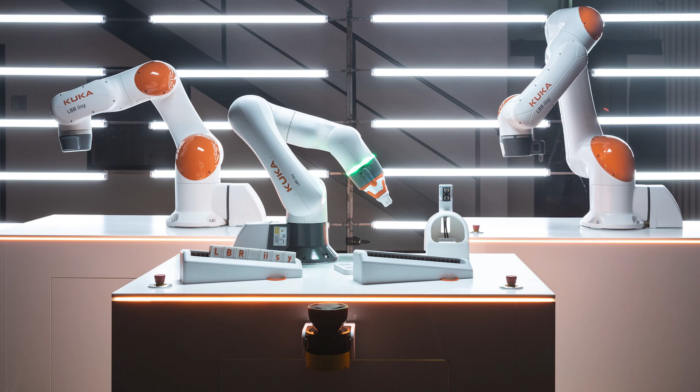So, the next generation of collaboration. Well, also in the KUKA world, there is not so much new with the collaborative robots. In fact, we've had our LBR iiwa since before 2015, and it was actually one of the absolute first collaborative robots on the market. And we've been selling quite a few since then.

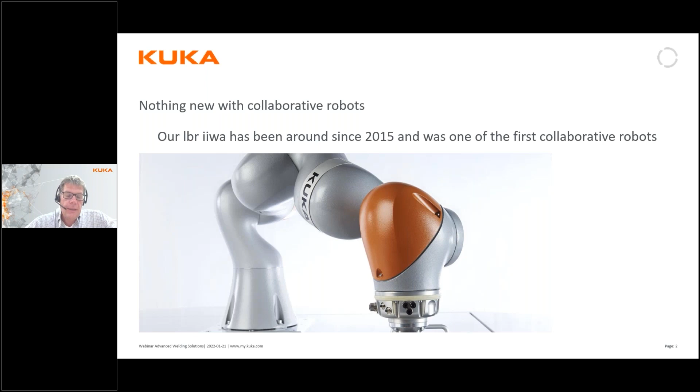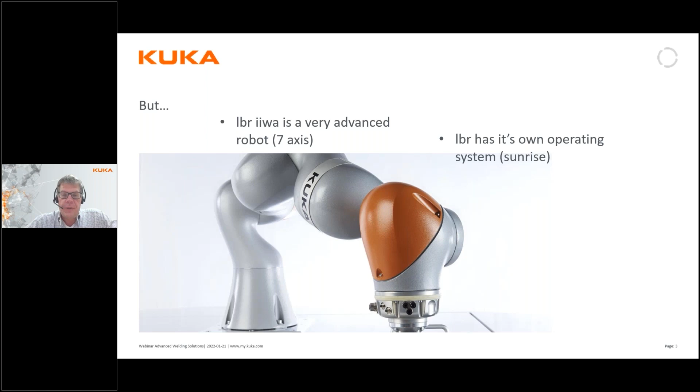But you hear the but coming: the LBR iiwa is a very advanced robot. Among other things, it's a 7-axis robot to make it really flexible. It has its own operating system, which we call Sunrise, which requires Java programming, which differs it from the rest of our robot language and the programming language you use there. It is actually a quite high-priced product since it's a top-of-the-range robot.

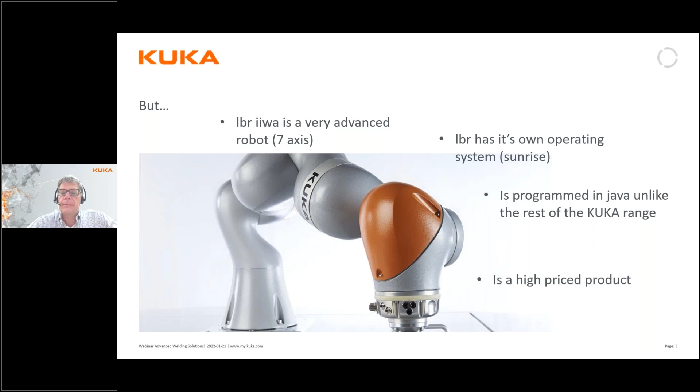So what we needed was actually something new. And as robot-based automation is rapidly growing all over the world, we see a lot of new opportunities. But we also need to lower the threshold for many users to get into robotics.

We need robots that are as intuitive to use as a smartphone to really give an overall better customer experience, with accessible, easy-to-use hardware which is easy to understand, simplified business interaction, also how we act together with you as customers and the end customers, and increasing effectiveness both in the projects and in the commissioning phase, to make it more accessible and easier to actually create your robot applications. So what did we come up with? Well, as I sometimes do, I will share a video with you.

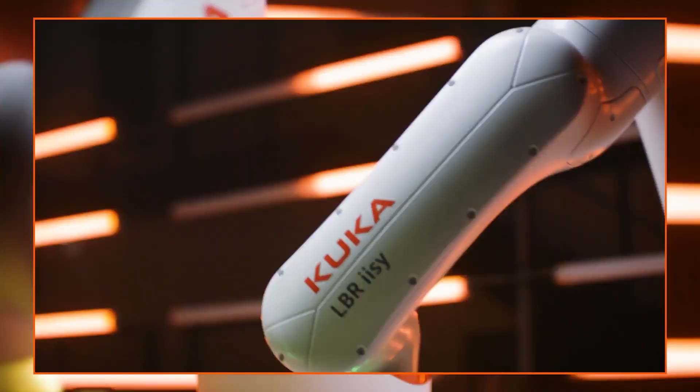Industrial intelligence.

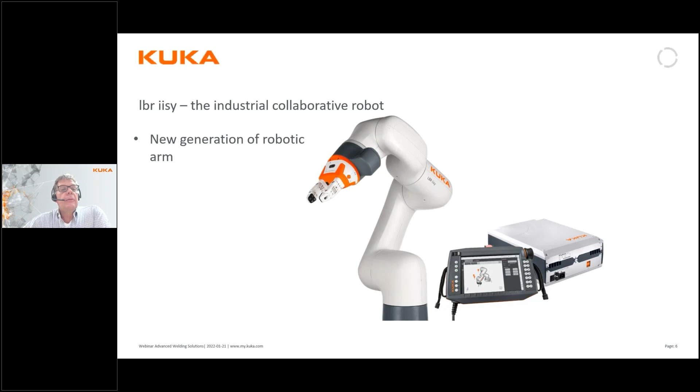So I hope everyone could see that video. So, LBR iisy, the completely new robotic arm from KUKA. As you see, it is a completely new design of a robot, and some of you may have already seen it. We've shown it quite a lot at fairs over the recent months. But it is, as I mentioned, our completely new generation of robotic arms.

It is a cobot in many ways because it has torque sensors on all joints, so it can detect collisions, measure torques and actually act. It has a hand button for hand guiding. We can program it by hand guiding it, with the black-gray part above the gripper you can see here, which is standard on all these robots.

But not everything is new with it. We use the same controller hardware as we do with our other small robots, the KR4s, the SCARA robots, the Agilus robots. So we have reliable, tested hardware here. It's the KR C5 micro controller which is used to control this robot. But the SmartPad is a new one. It's called the SmartPad Pro, which has a landscape orientation instead of a standing orientation as the old SmartPad has. And there are a lot of new features in that as well.

And especially, even though it is a collaborative robot, we've really put an effort into making it a low-cost robot. And perhaps you see we are calling it an industrial collaborative robot, because the human-robot collaboration mode, with collision detection and so on, is actually just a feature of a robot as we see it. It's not a special robot designed for this. It is a feature of the robot. The robot has the hardware to detect collisions, but we can at the same time use it as a normal industrial robot running at high speed. There is no difference between a collaborative robot and an industrial robot.

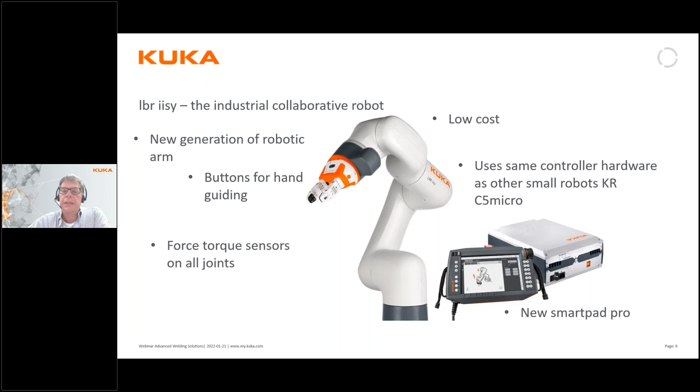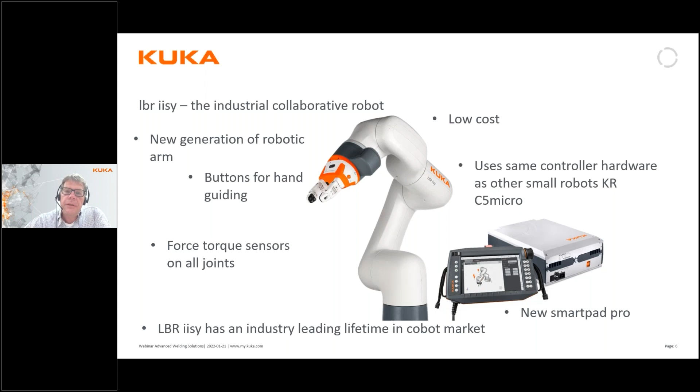And this provides you with all the features you expect from an industrial robot. For example, with this robot, you can expect the same lifetime as you would from a standard robot, which makes it really leading in the collaborative market.

If we deep dive a bit more into it, we can see that the controller, the C5 Micro, is nothing new. As I said, it has 16 IOs on board with safe signals and the possibility to have scanner integration. There's the new SmartPad, and there is a complete human-robot collaboration function set for fenceless operation built into the robot from the beginning. It has a very easy and simple way of programming. We will dive into that shortly.

It actually has a 3D scene as well. You can see what the robot is doing directly on the SmartPad and see the safety spheres, the safety tools, and so on. Collision detection, axis range monitoring, safe diagnostics. All this is built in from the beginning.

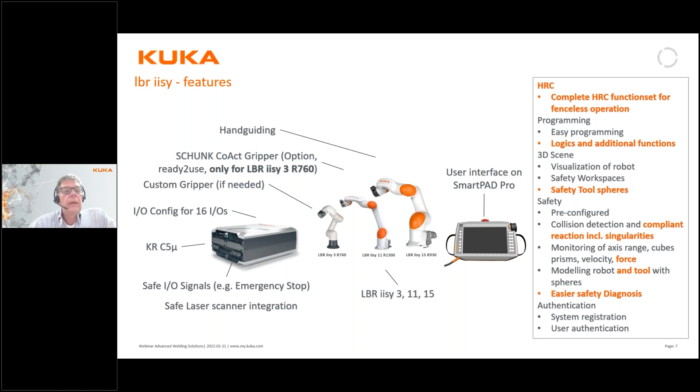And when I say that this is an industrial robot, we can have a quick look at the specs of this robot. So the smallest one, which is available on the market from the 1st of October, is what we call the LBR iisy 3 R760. That means that it is a robot which has a 3 kilo rated payload with a reach of 760 millimeters. But as with all our small robots, you can mount it in any position you like, on the floor, on the wall, on the roof, or even at any angle you like.

This smallest robot has a pretty low protection rating. It's only IP30, which makes it basically dust-proof, you could say. But have a look out here at the speed of this robot, the possible speed you can run it, which makes it actually quite a fast robot. It's almost as fast as our KR4 robot, which is among the fastest on the market.

That means that we can actually use this robot in either a collaborative mode, and as you know, in a collaborative mode, we can't really move that fast because of the collision energy. But I can also turn off the collaborative mode and run the robot in a high-speed production environment.

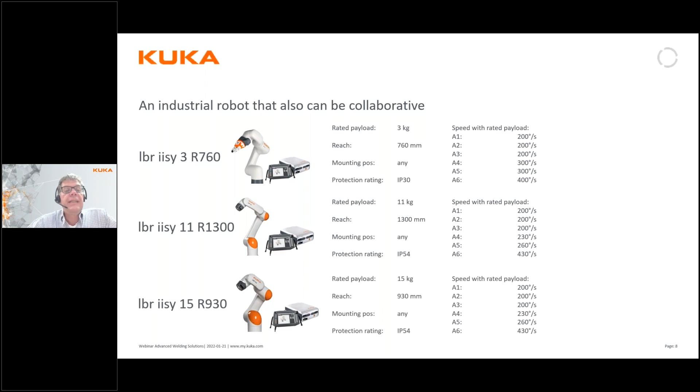And as you probably saw in the video, this iisy series of robots consists right now of 3 robots, actually. And the 2 larger robots will be available a little bit later this year, around the end of the year on the market. It is an 11 kilo robot with a reach of 1300 millimeters and a 15 kilo robot with a reach of 930 millimeters.

And these two larger robots actually also have a higher IP protection class, IP54, which makes them really suitable in a non-clean industrial environment. And the same as their smaller brother, they can be mounted in any position you like. And these are quite fast in their movements.

But as with the smaller one, they have force torque sensors. They can detect a collision with an object or human and stop and retract. So they can also activate their collaborative mode. So an industrial collaborative robot, which can be used both as an industrial robot or as a collaborative robot, and you can actually switch modes depending on needs.

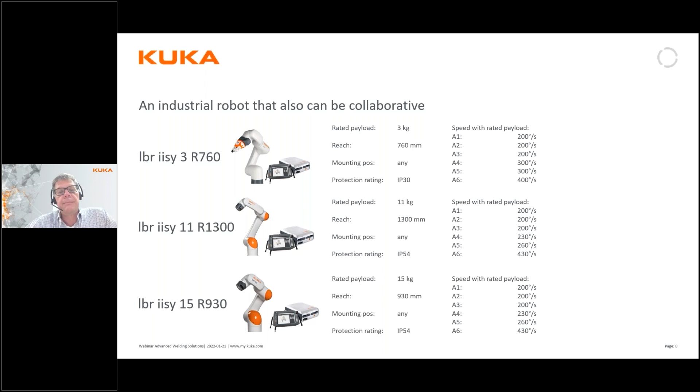So our idea with this is actually to create a robot which has low cost, accessible hardware, which you've seen. We have also put great effort into developing a new operating system for these robots with a new user interface. You see a screenshot in the middle of the screen right now, to increase the usability, the user friendliness and ease of use. So to make it simple to create simple robot programs.

And in this operating system, there's also what we call an ecosystem, an open platform, an API set, where you, as customers or suppliers, can develop your own functionality which gets built into the operating system. Plugins, if you like, for special functions, for special grippers, whatever you can come to think of. So an open development platform.

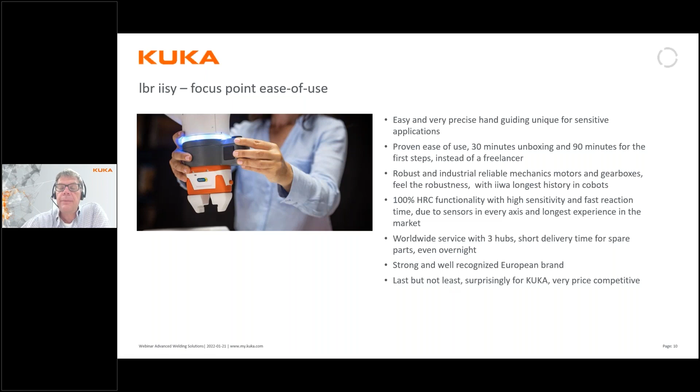But it also gives you a really intuitive programming mode where you can create your program steps with the help of simple wizards. And when we show this robot at fairs, we actually encourage customers to try to write their own small programs at the fair, and they find it really, really easy to do this.

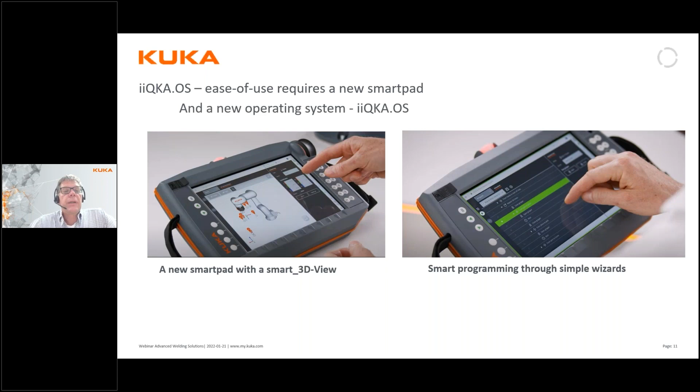And we call the new operating system iiQKA OS, and you will hear more about it at a later webinar separately. But basically, it has 6 wizard-based pages to switch from. First, there's a basic setup screen where a wizard guides you through the complete process with mastering and so on. There is a programming wizard screen, which allows you to browse through the commands and where the wizard helps create your program steps.

A 3D Smart View, where you can simulate and run the program and see what the robot is doing. Even though it is a collaborative robot, we somehow need to take care of safety configuration, safe zones where the robot may go and may not go. And this is done through wizards and graphically displayed smart configuration pages directly in the SmartPad. And the same goes for tool and bases, wizards that guide us clearly through the process.

And of course, we also need to take care of IOs. If we have some sensors or some push buttons connected to the robot, we need to tell the system how to behave on these inputs and outputs. All this is wizard guided. So we divide this in a few steps. We have a smart startup wizard, which tells us how to install and connect the robot. A smart configuration wizard, which runs the basic setup of the robot. A guide which helps us to do programming.